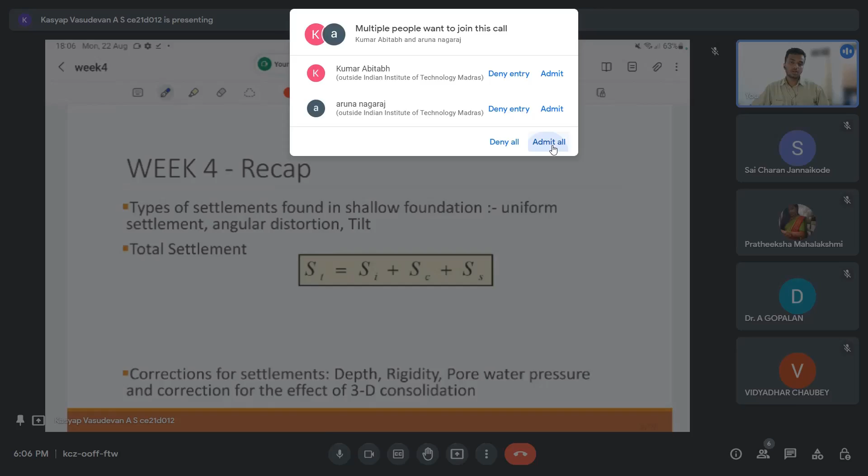So just for a little recap of what we did last week: week 4 deals with the settlements of foundation, especially shallow foundation. Last week we discussed shear strength, trying to find out the bearing capacity of the soil with respect to shear strength. But this week we are trying to also get the aspect of settlements, because settlement is also something which controls the safe bearing capacity, the allowable bearing capacity. Many times, even if failure has not happened, settlement would have been quite high, and in order to control settlement for serviceability, we will have to check the settlement also.

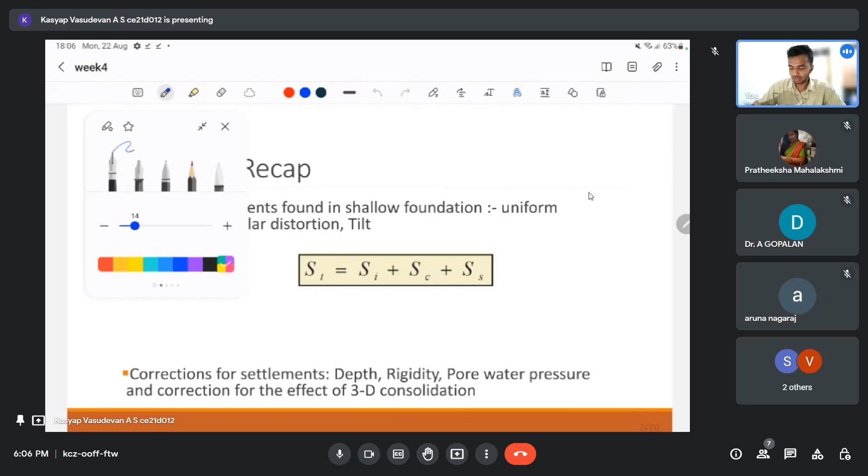So the idea is to figure out the settlement of a shallow foundation. When we say settlement of shallow foundation, we can define different deformations of shallow foundation in different ways. For example, one is uniform settlement. Uniform settlement is when we have the same amount of settlement throughout the base of the footing or foundation, wherever.

In a way, it is the safest foundation one can have, because there will be no structural damage to the constructed structure. Since the whole structure is settling uniformly at all points, there won't be any additional moment or shear force developed due to differential settlement. So uniform settlement is fine, but if it is very excessive, again the serviceability issue will be a problem.

For example, there are many cities that lie on lake beds, like Mexico City. If you go through the geotechnical problems they face there, there are buildings that have settled for a huge amount, like half a floor or one floor, and they have had to modify things. Though the structure is intact with no cracks at all, the whole building has come down because it's all on the same lake bed, and the stresses below the building are the same. Because of these things, uniform settlement can happen.

Though it's the safest among all the other things, there is an upper limit for that. So we need to take care of that.

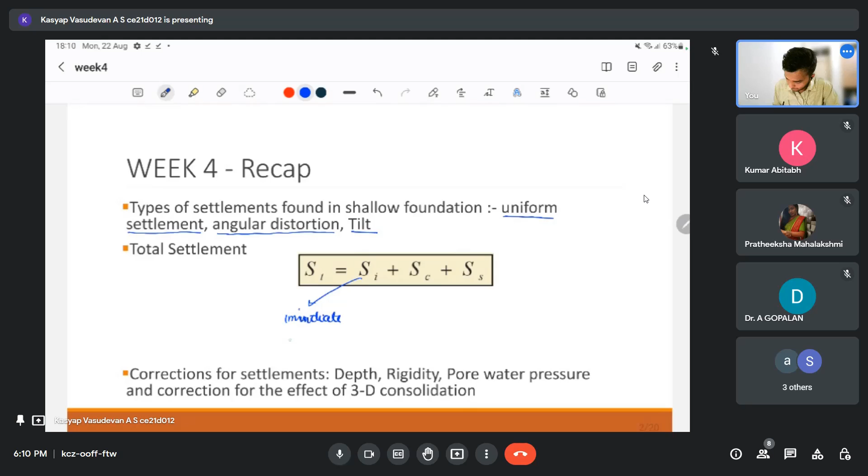So that is the three different ways of putting the deformations we encounter with shallow footing. When we say settlement, we have to mention these three settlements: there is immediate settlement, there is primary consolidation settlement, and there is secondary consolidation settlement.

Now the relevance of these three: the first one is also called elastic settlement, because the moment we load, due to its elastic properties, whatever material it is, it will have some elastic properties. Because of that, there will be an immediate settlement due to the material property. So this deals with elasticity, which is a material property.

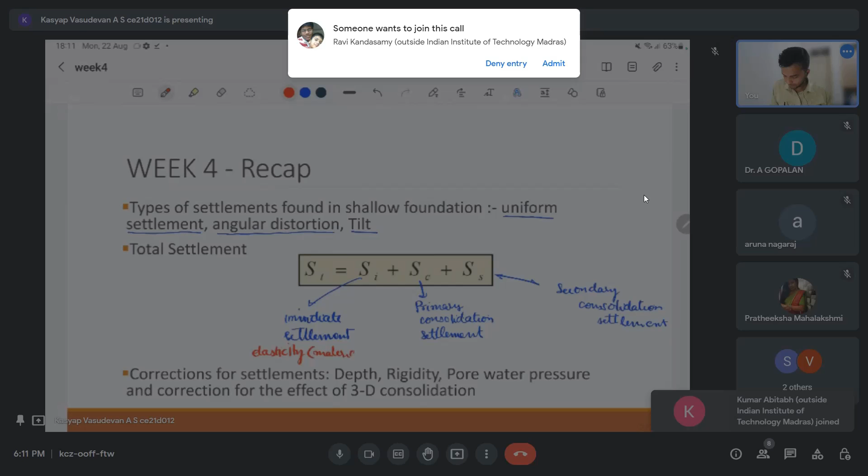And the second one is primary consolidation. This is exclusive for clays, right? So consolidation happens in clays, which is time dependent. This happens in clays, both normally consolidated or over consolidated. The idea is that water escapes out, and the volume of water that escapes contributes to the settlement. So that is the idea.

Okay, so the other thing is secondary consolidation settlement. This occurs in organic clays towards the end of the settlement. We assume that it happens after primary consolidation is complete. That is the assumption, but in reality it can begin the moment it is loaded. When there is too much organic content, this can happen because of decomposition of the organic matter, and also rearrangement of particles.

These two things can contribute to the secondary consolidation settlement. So when we talk about these things, all soils may not show these three settlements. For example, sand only deals with immediate settlement. It's quite intuitive, right? Because consolidation doesn't happen in sand, so immediate settlement is the dominant one. I could say that 100% is immediate settlement because of elastic compression.

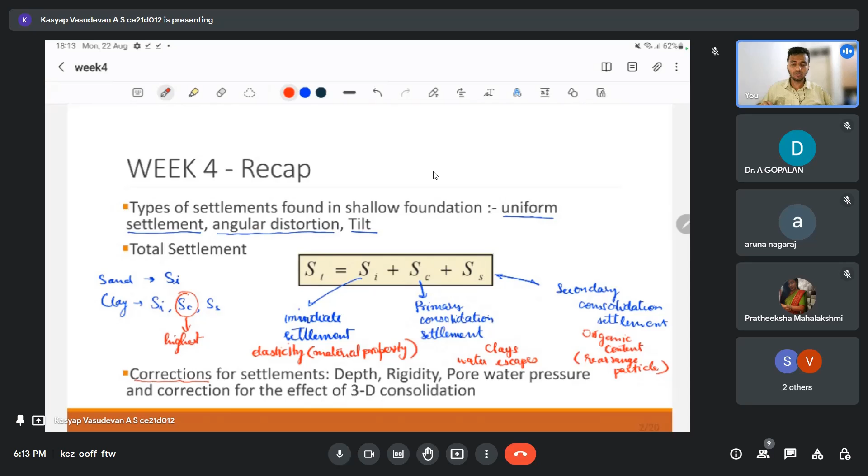Okay, then after that we moved on to the corrections for different settlements. So the thing is there are different factors that influence our settlement. For example, depth. In order to normalize our settlement for different depths, we bring it to the ground level using this depth factor.

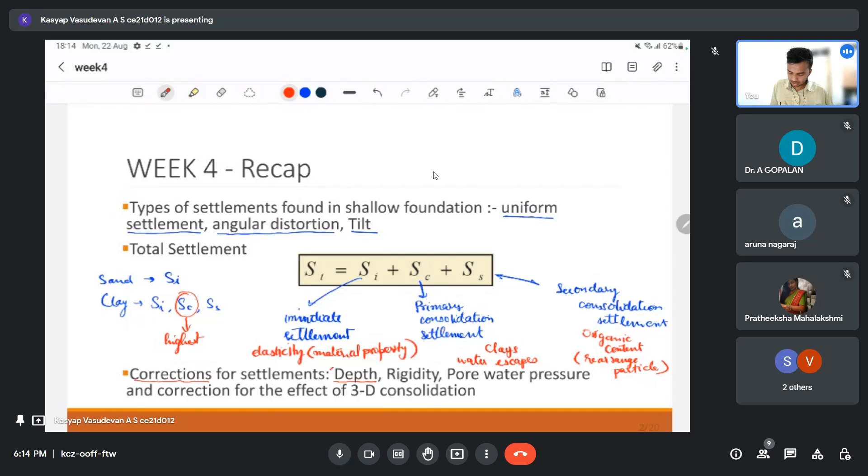And rigidity. The thing is, when we have a flexible footing, like any isolated footing, it can have different settlements at different points depending on the column position. At the middle it will be the highest, but when it is a rigid footing, it will settle uniformly. So if we are dealing with a rigid footing, for example a mat foundation or raft foundation, we'll have to consider that and reduce it a little bit.

And the other two corrections are for pore water pressure, or it can also be taken care of by the correction to consider the effect of 3D consolidation. If you remember, the equation for consolidation was derived from Terzaghi's 1D theory. But in our real world the footing is under 3D conditions, so the consolidation is happening in all directions. So we have to consider this particular correction for that.

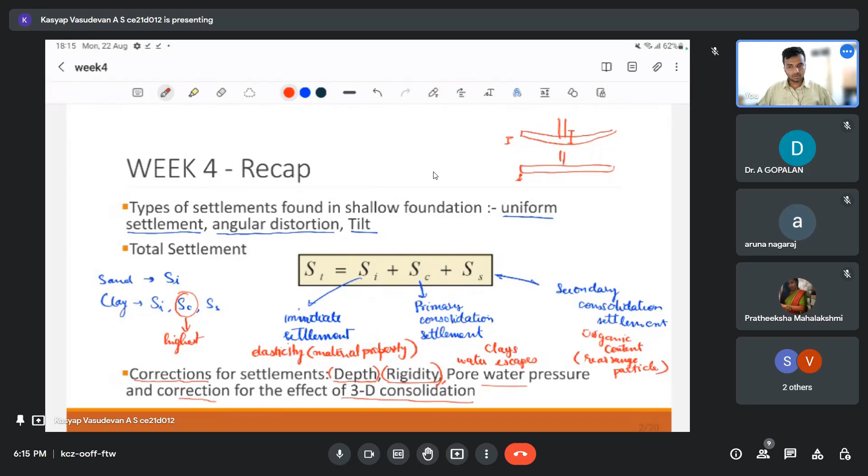Then we moved on to different ways of calculating the settlement. And among those, the primary one is the plate load test. This is a very important test for obvious reasons. As I told before, till now we were dealing with the shear strength of the soil in the last class. We were finding the safe bearing capacity, SBC and all, with respect to shear strength. And this week we were dealing with settlements.

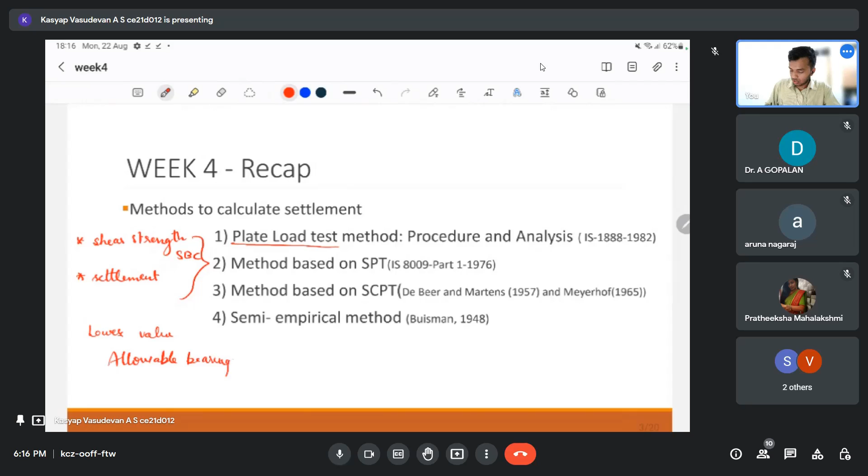So what the plate load test does is, okay, we'll have one more bearing capacity using settlement. Among these two we have to take the lower value. That will be our allowable bearing capacity, the capacity we will be reporting to the structural engineer to design the foundation. This is very important. So the plate load test gives us the relation between load and settlement.

Once settlement comes into picture, we can get our required settlement requirement, the tolerance. Each structure will have a different tolerance. So for our particular tolerance we can find the load acting on the plate, and from the plate we can arrive at the pressure at the footing. So indirectly we are getting the bearing capacity. Bearing capacity from these two criteria, where the lower value will be taken as the allowable bearing capacity.

This is a very useful particular test, especially for site investigation. If you are ever involved in these things, this we have to keep in mind. Procedure and analysis were both discussed in detail last week. Since this deals with field testing, this gives a better prediction for the settlement.

Now if we are not able to do plate load tests, we have other ways also to find out the settlements. One deals with SPT. From SPT we can directly get our settlement values. These are based on correlations. As I told earlier, correlations have their own disadvantages and limitations, but anyway this is also useful.

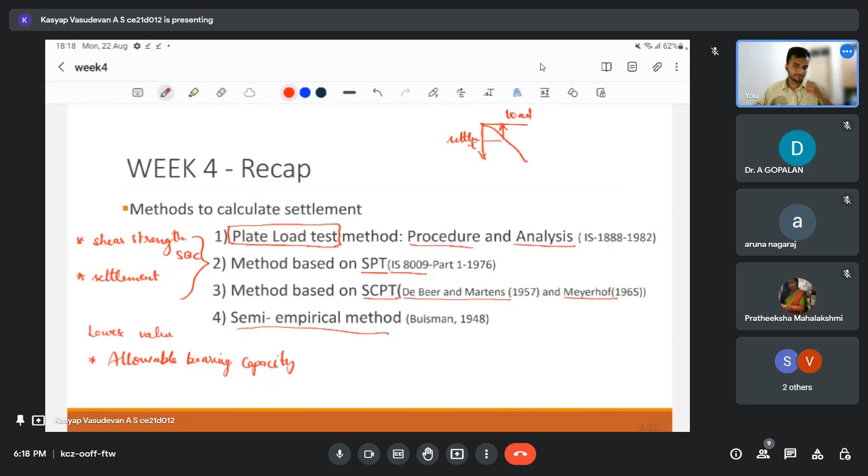Okay, so this was the things that were discussed. Let's jump on to the first question. The first question deals with a plate load test, and it's a granular soil. We know that the plate load test works better for granular soil. So we have a dimension of 60 centimeter for the plate. We also have a dimension for the foundation.

Plate settlement was found from the load settlement curve for the expected foundation load of 1200 kN. So this is the foundation, and we have the plate settlement given here. What would be the estimated foundation settlement? We are supposed to find the foundation settlement if the water table is at 2 meter below the base of the foundation. Use Terzaghi and Peck's equation for calculating the settlement, and the IS method for water table correction.

Before we jump into the questions, first let us see the equation which is important here, as they have asked for the Terzaghi and Peck equation. This is the Terzaghi and Peck 1948 equation, which relates settlement of footing and settlement of a plate.

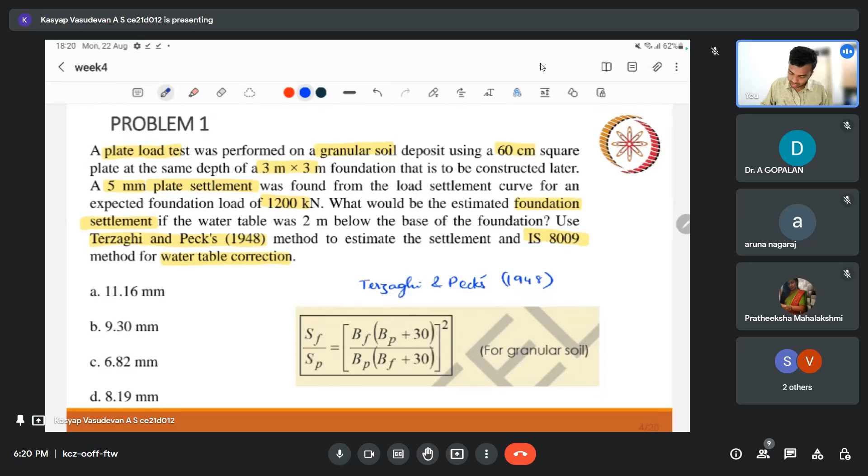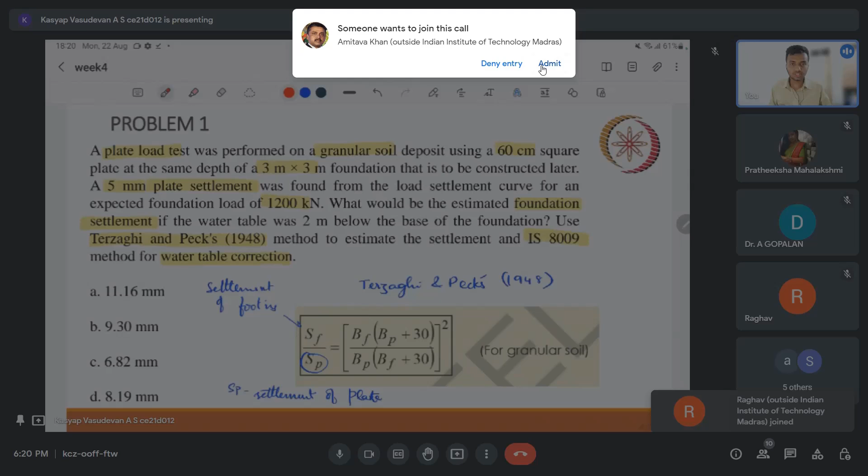So we have this: settlement of plate, SP, and settlement of footing, with suffix F indicating footing. Similarly we have other terms: width of the footing, BF, and width of the plate, BP.

From this equation you can directly understand this is empirical, because we have 30 just like that, so units are important. We have to substitute the unit for width of the footing in centimeters, so we should not forget that before we use it. This particular equation is only meant for granular soil. If it is a cohesive soil, we can directly take BF by BP in the RHS instead of the whole squaring thing.

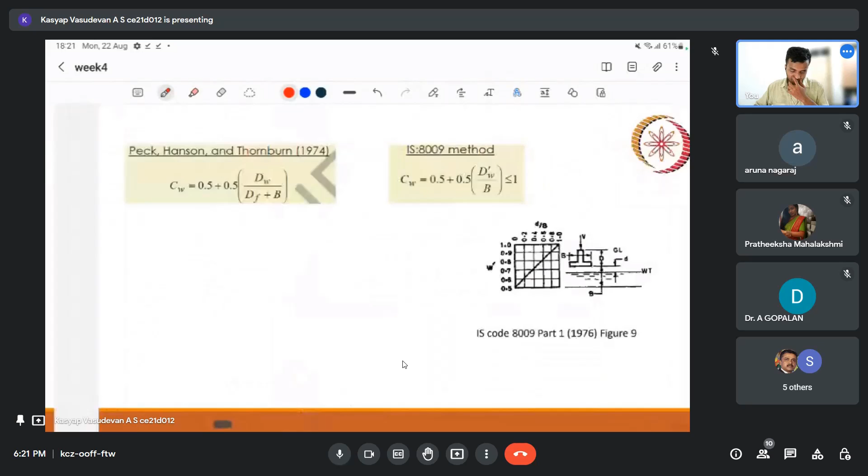Okay, let us first solve this. We have to find the settlement. In the question we have SP equal to 5 mm. BP is equal to 60 centimeter. BF, that is the width of the foundation, is 3 meter, that is 300 centimeter.

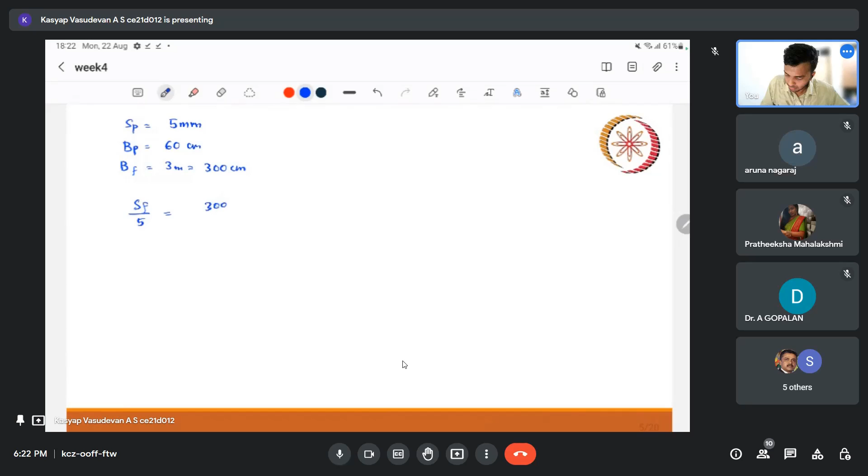So we can directly substitute this in the equation. SF by 5 - 5 I can write directly in mm, because whatever value I get for SF will be in mm, since this is a ratio, it doesn't matter. In the RHS we have BF by BP, so BF is 300 by 60, and at the numerator we have 60 plus 30, and the denominator we have 300 plus 30, whole square. This comes out to be, if you solve this, SF will be...

9.297 mm. So we have the settlement of the footing, but we have to correct it for water table also. When we correct it for water table, they have specifically mentioned it has to be the IS method, IS code method. So let us see what it is. When we say water table correction, there are two methods.

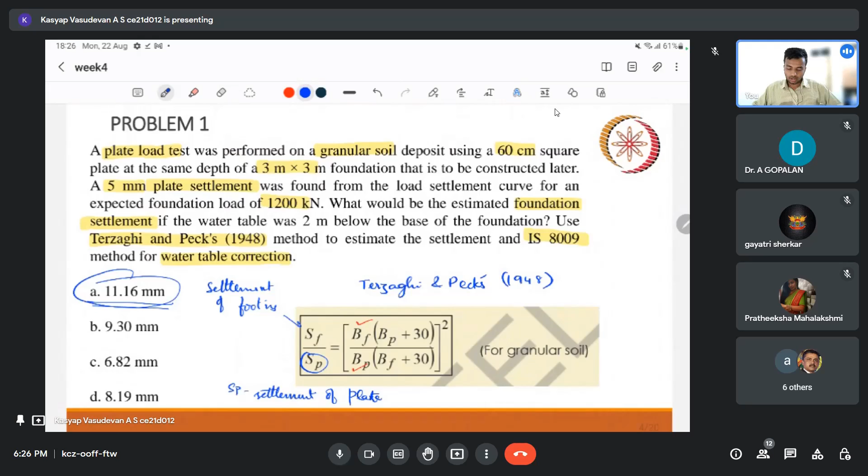So even if this question was extended to Peck Hanson, I hope you will be able to do it, because ground level - they have not mentioned ground level here. If they had mentioned ground level, or the depth of the footing, we can directly write this. I hope the first question is clear.

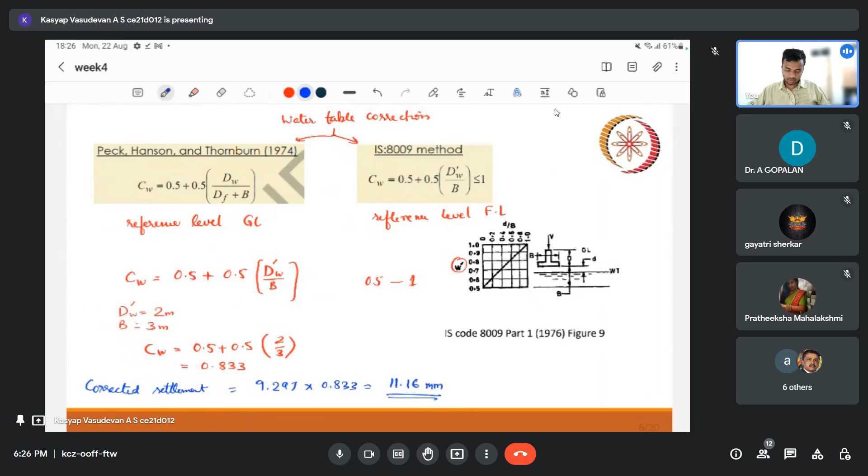Now let's move on to the second question. Second question deals with consolidation settlement, that is primary consolidation settlement. So let us just go through the question.

We have a footing which is rectangular, and the thickness of the clay is mentioned. It's normally consolidated clay, underlain by a rock layer. The depth of the foundation is given, and this is the expected load intensity of the foundation. Properties of the soil: we have submerged unit weight, CC, and initial void ratio also given. Water table was at the ground level. So find the expected primary consolidation settlement.

So primary consolidation settlement we are supposed to find considering 2:1 pressure distribution. At this stage we are not told to apply any corrections, so in this question they have mentioned - we will stick to that.

Before that, let's just recap the equations involved here. These are the two equations that we use for settlement. If you have gone through this before, it will be a repetition for you, but let me just explain it very quickly. There are two equations that we can use to find primary consolidation settlement - that is, these are the two.

One involves CC, that is compression index, coefficient of compression, and E naught, and the other involves coefficient of volume compressibility. So first let us be on the same page: CC is nothing but the coefficient of compression index, and E naught we know is the initial void ratio.

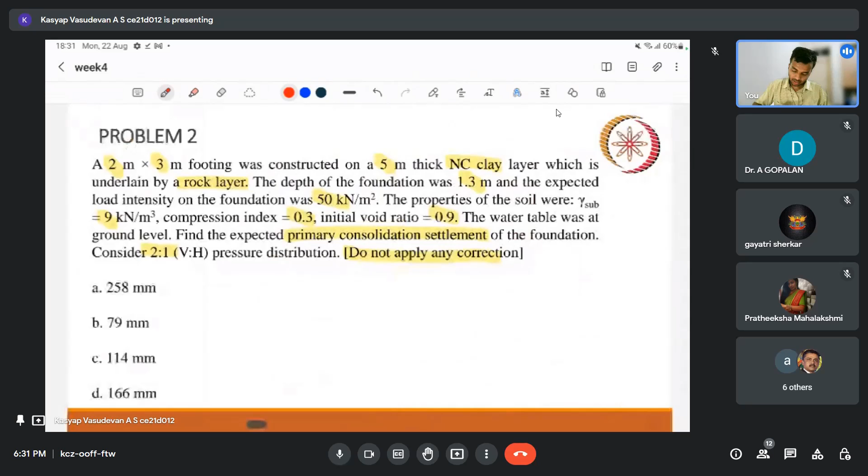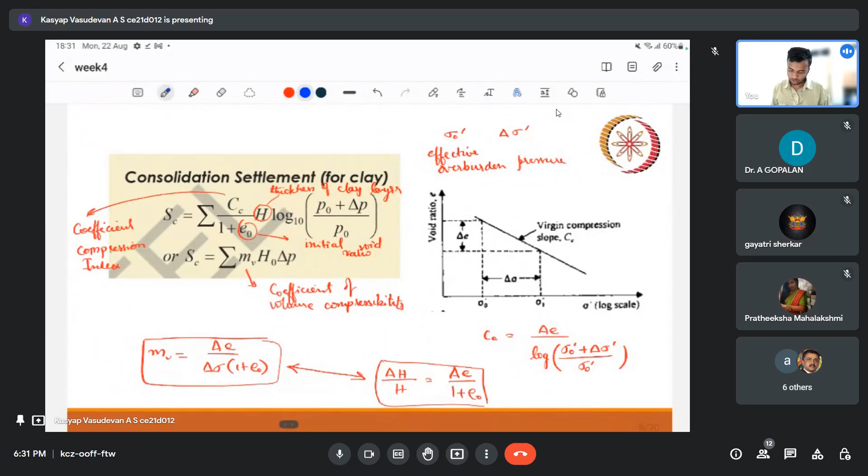So having said that, the data we have at this point is Cc and E naught. So the data we have is Cc is equal to 0.3 and E naught is equal to 0.9. So we can use the first equation here.

So this is at ground level. Groundwater table is at ground level, and this is a rock base that we have. The foundation level is at

what was the depth? 1.3 meter. So the total thing is 5 meter. Foundation depth is 1.3 meter. So what is our thickness of the clay layer available for settlement? That is 5 minus 1.3, that will be 3.7.

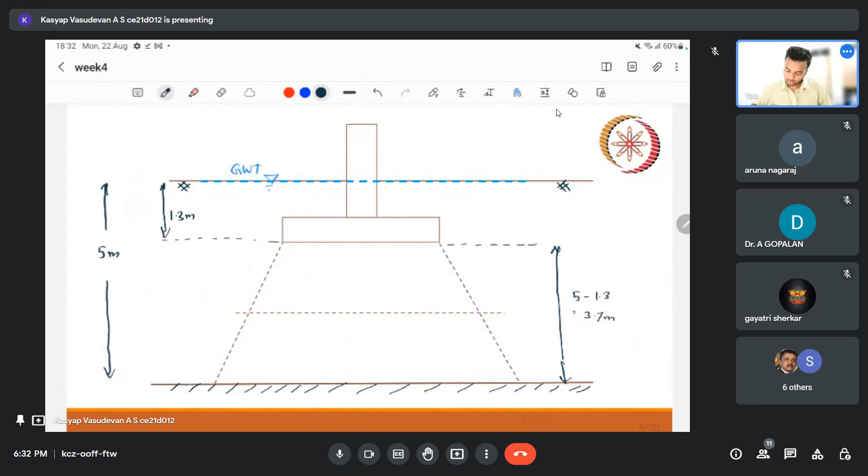Now, as I told before, we have E naught, Cc are constant. That is, there is nothing to worry about it. H is the thing that we are dealing with here.

The influence zone. What is influence zone? We'll come to it in the coming slide. Influence zone is taken as 2b from the base of the footing. So base of the footing is here. It is 2 meter, right?

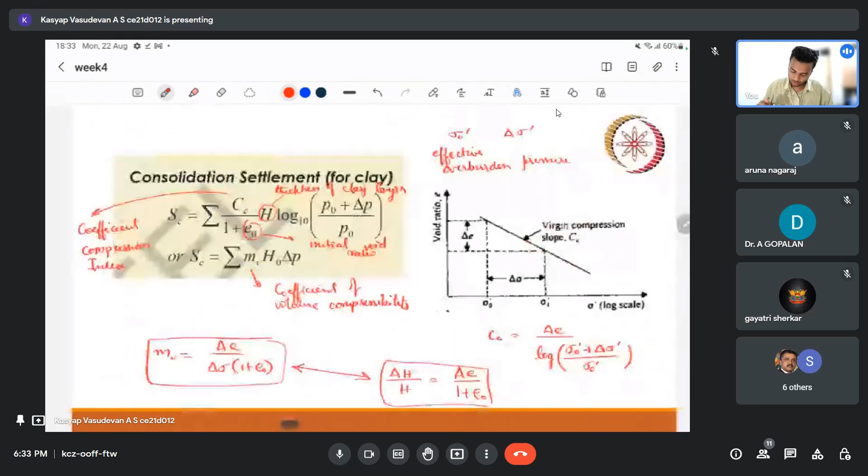Yeah, so width of the footing is 2 meter. So our 2b will be, sorry not 5, 4 meter. And if you see 4 meter plus 1.3, it will go beyond this hard strata. So our consolidation will only happen till here. So we can come at 3.7. Why this 2b, we will come to it in future.

Now another thing here involved is our delta p and p dash. So let us come to that.

Okay, so p dash, that is a sigma dash, that is overburden pressure. So we are trying to find the settlement at this point. Actually, strictly speaking, whatever we are going to find is here, assuming that we are taking the average for the whole clay layer which is available for settlement.

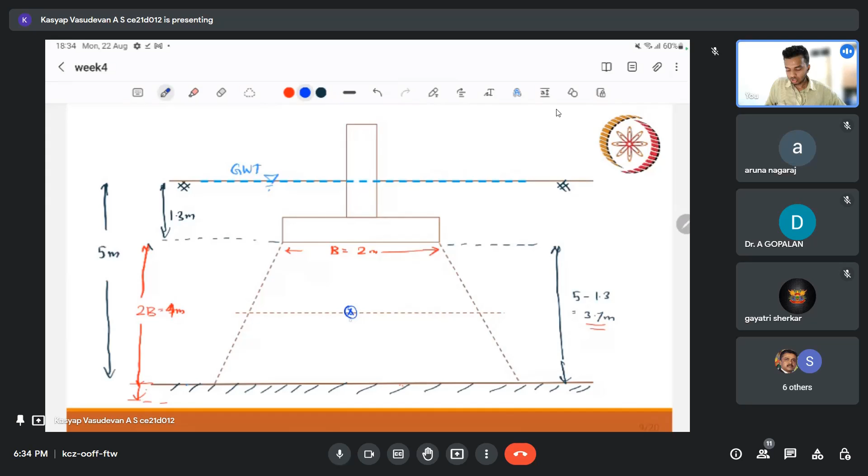So at the center, at the middle of the layer, we are considering trying to find the settlement. So the stress at this point, we are dealing with the stress at this point. So half of this middle layer will be 1.85. That is 3.7 by 2, 1.85 meter.

So overburden pressure. So the thing, details that we have is, gamma submerged is 9 kilonewton per meter cube. So overburden pressure is quite clear. We have 1.3 plus 1.85. So the depth is 1.3 plus 1.85 into gamma dash, that is our 9. This turns out to be 28.35 kPa.

Okay, our last headache. This is the most important part in this equation. Delta p, or delta sigma. This depends on how the load is getting dispersed from the footing to the deeper depths. So in this case, in the question, they have directly given 2:1 will be the pressure distribution.

That is actually debatable - it's the easiest way, but it is debatable. But since they have mentioned it, we can take it as 2:1.

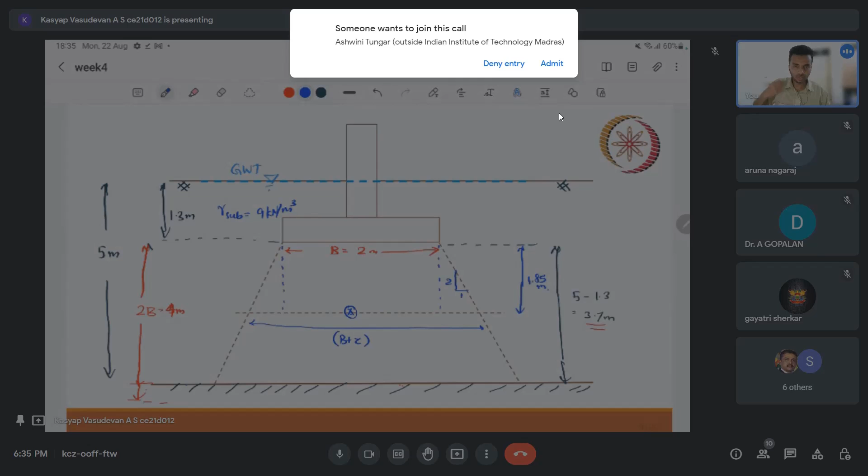So if it is 2:1, our dimension, like the pressure distribution, will be along this length. So this length can be written as b plus z, the dimension will be increased by the depth. Since this is our z, this part will be z by 2, this part will be z by 2, because it's 2:1, and the total will be b plus z. So our length in the other direction will also increase by z. But we don't know the total load, right?

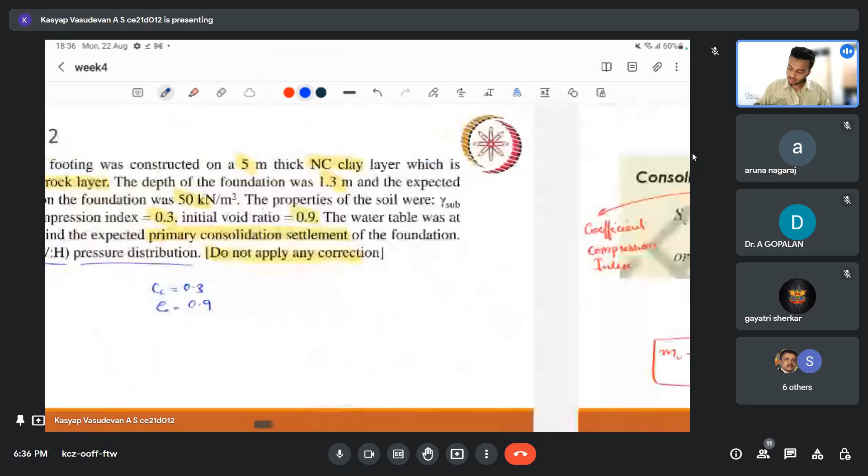We are only given the foundation pressure. So at the foundation we have q equal to 50 kPa. We can calculate the total load as q into l into b. That is 50 into 3 into 2, which is 300 kilonewton.

So what will be the stress at this depth? We'll have to consider the whole length at the middle layer, that is b plus z and l plus z. That will be our change in stress at the required middle layer. That will be 300, that is the load, and that will be the same.

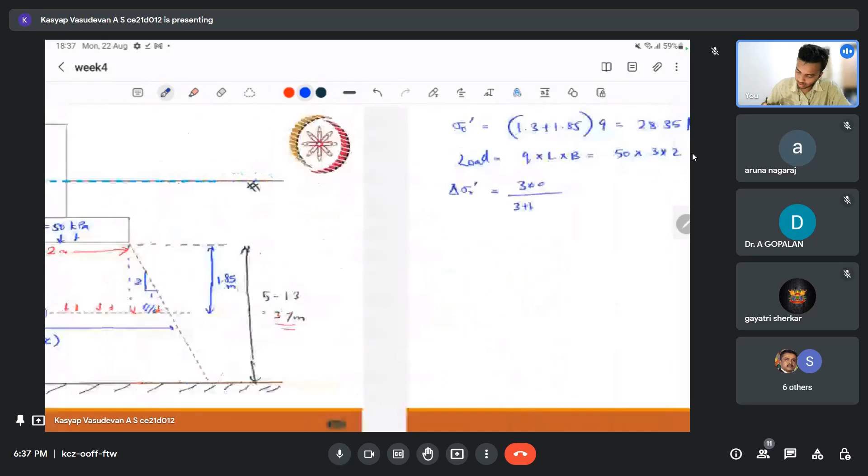Divided by the new denominator - our 3 will be increased by z, which is 1.85 for us. So 3 plus 1.85 and 2 plus 1.85, that is the length and breadth, both increased by 1.85. This turns out to be, if I'm not wrong, 16.06 kilonewton per meter square.

So we have all the terms now. Now it's just about substituting. So S can be written as 0.3, that is our Cc value, 3.7 that is our H, the thickness of the clay layer available for settlement, and 1 plus e naught, e naught is 0.9, log of sigma, that is 28.35, plus delta sigma is 16.06, divided by 28.35.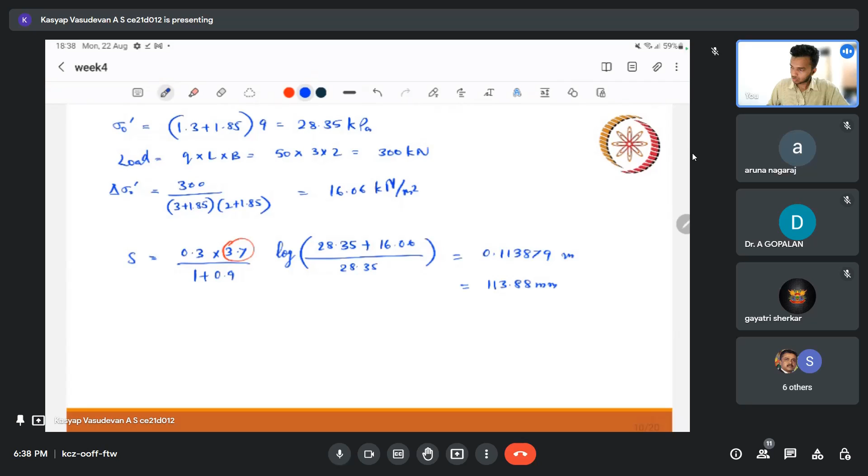This comes out to be 0.113879. Whatever unit we give for the thickness of the layer, that's what we'll get - so this is in meter. We can write this as 113.88 mm. So one of the options is 114.

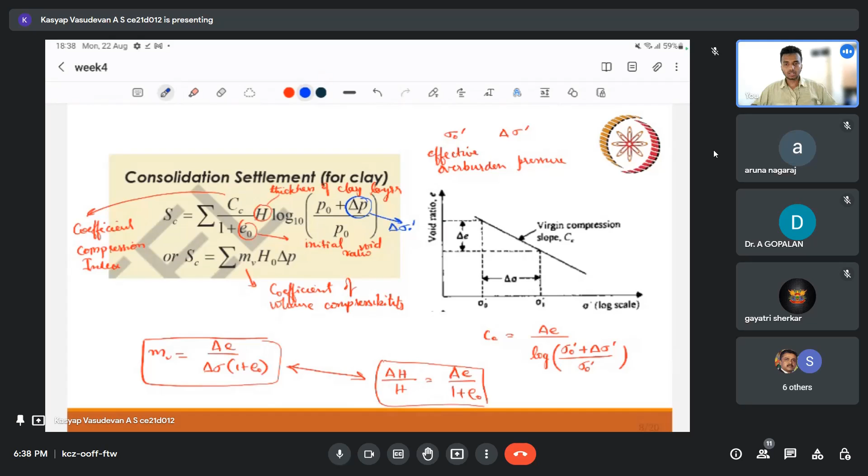So that's it. This equation is very important. When it comes to consolidation of clay, we need this at our disposal all the time, so all the terms should be clear.

Here, the thing we need to understand is this load dispersion. Since this is 2:1, we have to add this particular length at the bottom, that is z by 2 and z by 2, that becomes b plus z. And since it is 3D, in the length direction also there will be dispersion, taken care of by l plus z. That's why we have taken the new values.

So as you go deeper and deeper, the increment in stress due to the footing will be lesser and lesser, since the denominator will be increasing - L plus Z and B plus Z will be higher.

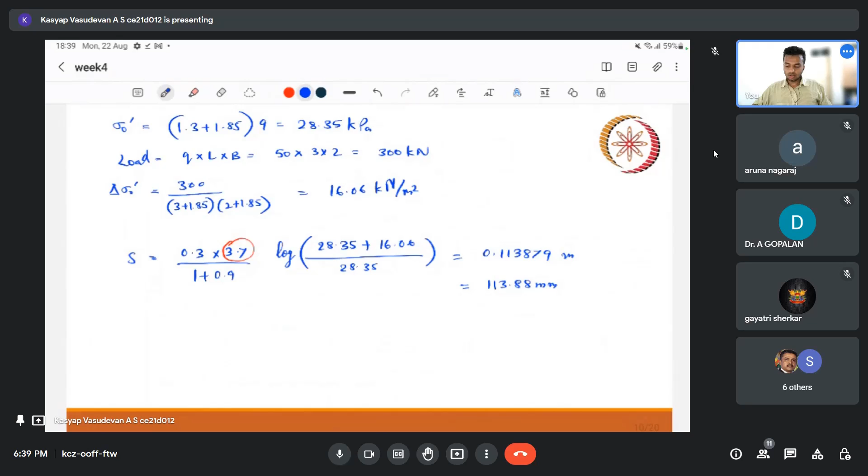Moving on to the next question, which deals with estimation of settlement itself. We have an isolated square footing, depth of the footing is 2 meter, in a sand deposit. This time we have sand - till now we were discussing clay. Now column load is directly given as 1500 kilonewton, and thickness of the sand layer is 12 meter. Here the thickness is quite considerable compared to the dimension of the isolated footing, so we will come to how that turns out.

Properties of sand are given - gamma is given, and cone resistance. As we discussed before, from cone resistance we can arrive at the settlement. There are different correlations, two of which we discussed, and they have told us to estimate the settlement using Meyerhof's method. Water table is at the base of the foundation, consider gamma w, and do not apply corrections.

So this is the equation involved here using the standard penetration test. We have talked about this before - we have different correlations for SPT and SCPT, static cone penetration test, using which we can use this equation. Here H is, as we discussed before, the thickness of the soil layer available for settlement.

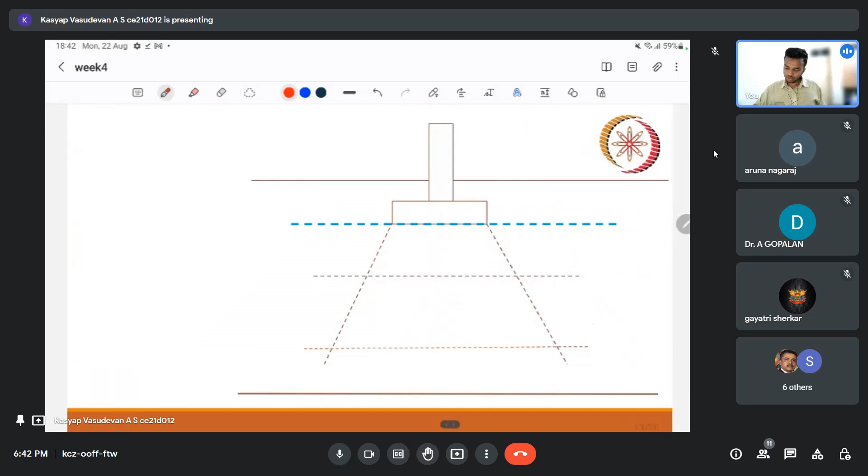So let's jump into the question, how it is. We have the ground level here, and the water table is given.

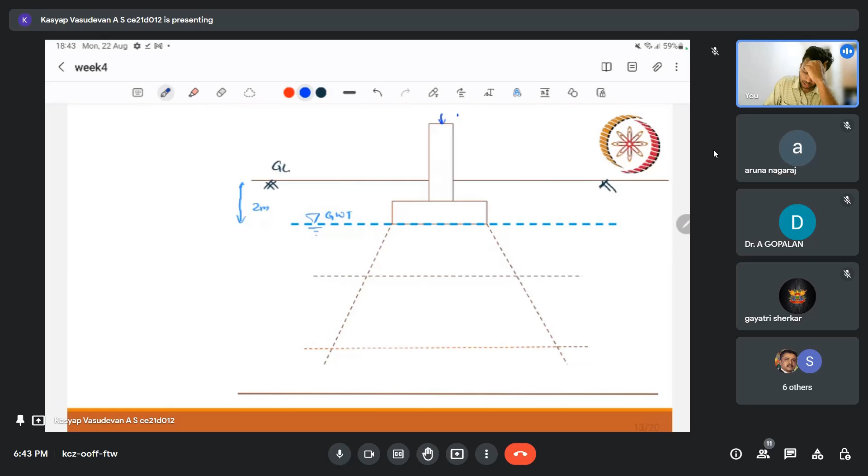So this depth is same as the depth of the footing. I think that is 2 meter. Okay, depth of the footing is 2 meter. And load that is acting is 1500 kilonewton, and the total depth that we are dealing with is 12 meter.

So that's what we are talking about now. When I say 12 meter is quite high, so we cannot take the whole 12 minus 2, 10 meter as the thickness of the soil which is available for settlement, because as I told before, that is the influence zone.

Now what is influence zone? So our influence zone is 2b. What is our b here? That is the width of the footing, which is 3 meter. This is a square footing, so 3 into 3. So this will be 6 meter. So only this is the influence zone.

So how did we get the influence zone? It's like if you draw the pressure bulb below this footing. When I say pressure bulb, it is a line which represents the same pressure. There are different pressure bulbs for different pressure levels.

So if we plot the pressure level for 10%, that is, if this is Q at the top, and 10% of Q, if we draw a line joining all the points which have 10% of Q, that depth will be 2b for a square footing. For strip footing and other shapes it will be different, but this is the significance. So 10% of Q is considered the limit; beyond that we are neglecting it. If we plot that, it comes out to be 2b. That's why we are considering only 2b from the base of the footing.

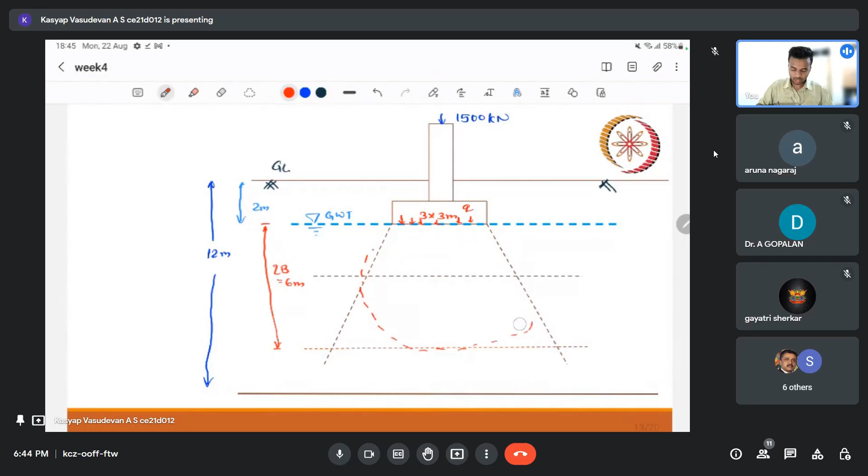So having said that, this shape and all can be obtained from different pressure distribution theories, the most famous one being Boussinesq's theory. So we are interested only till 6 meter from the bottom. The rest is similar.

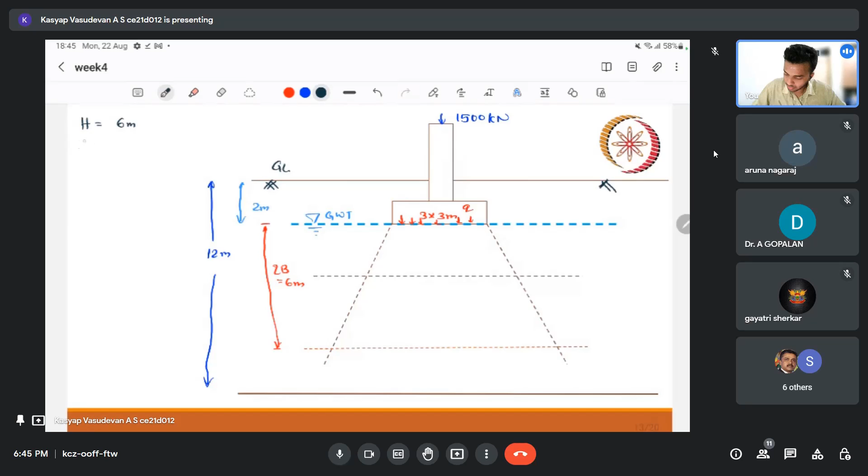What we have is H, we know C. I guess we can directly write it. So our settlement: H will be 6 meter, only 6 meter is available for settlement. Our C value, we have to find C value. C is equal to 1.9 by Meyerhof's method, 1.9 QC by sigma naught.

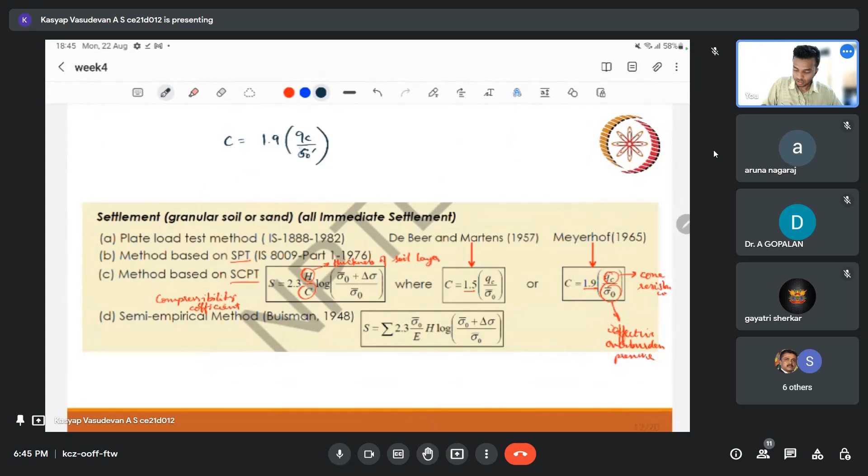Oh, so I forgot to find sigma naught also. Sigma naught is the pressure that is at the middle of this layer. That means this distance is 3 meter.

So sigma naught will be... this is the initial, okay sorry, sigma naught we are talking about is just the overburden pressure before the footing. So sigma naught is equal to just the first layer, this gamma is nothing but 19 kilonewton per meter cube.

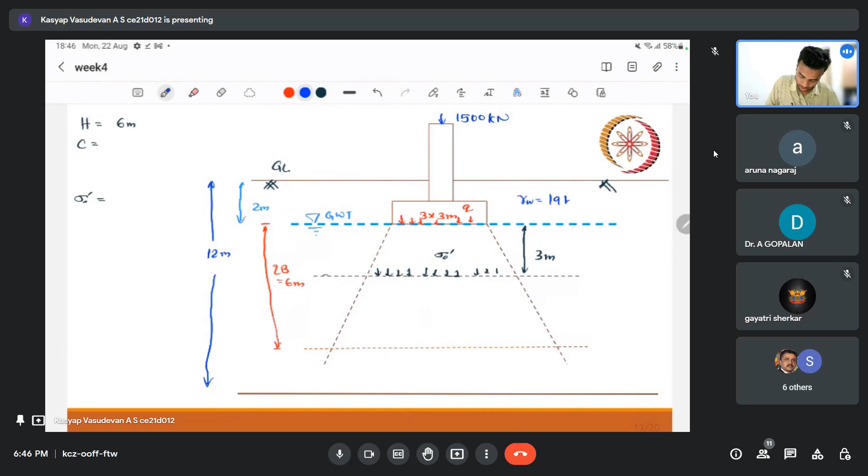We can conveniently take it as gamma sat also. Sorry, not gamma w, this is gamma bulk, equal to 19 kilonewton per meter cube. So we can assume gamma submerged is equal to 19 minus 10, that is 9 kilonewton per meter cube below the groundwater table. So first 2 meters it will be 19 into 2, plus gamma submerged into 3. This turns out to be 65 kilonewton per meter square.

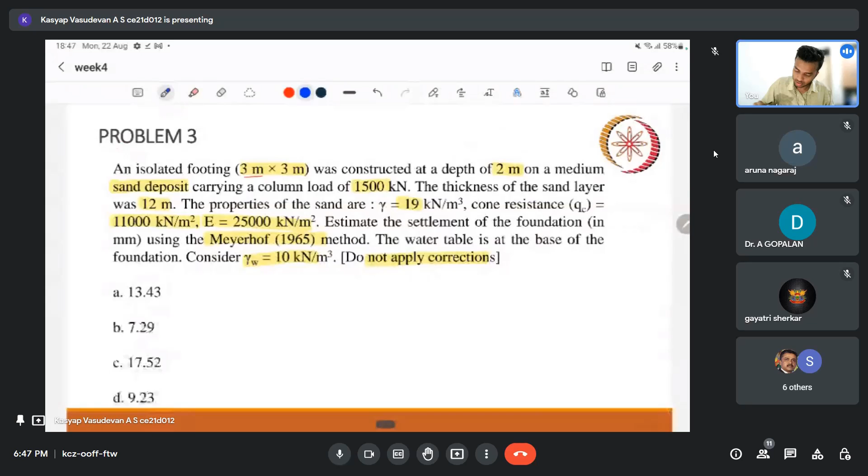So in this equation we can write 1.9 into QC. Cone resistance is 11,000. So 11,000 divided by 65, where 65 is our effective overburden pressure. This checks out to be 321.54.

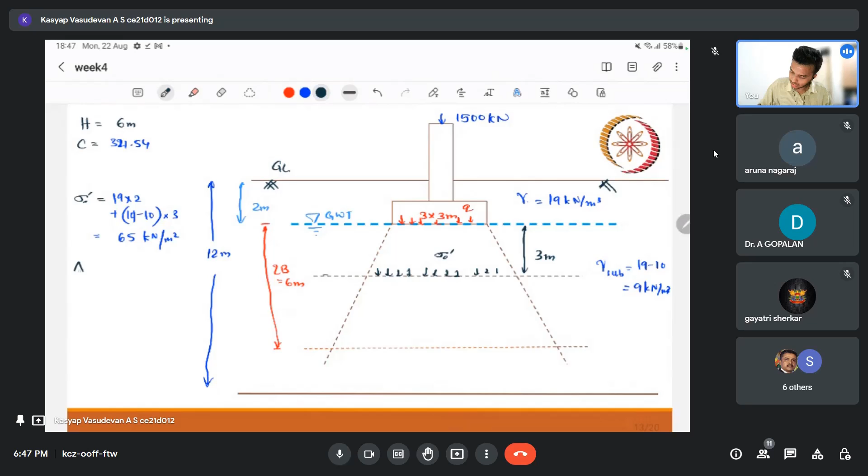So we have 321.54. What are the other things we need? We need delta sigma. In order to write that, we need this distance, which is nothing but b plus z. So 3 meter plus the depth, and b is 3 meters.

So again this 3. So our load is 1500 divided by 3 plus 3, since it is square, again 3 plus 3. That will be 41.67 kPa. So we have all the terms required.

Now we can directly substitute in this equation. S is equal to 2.3 into 6, that is our H, divided by C value, that is 321.54, into log of... okay, let me write this properly.

So the whole thing is 12 meter. Log of 65 plus 41.67 divided by 65. If you write this, the answer will be 9.233 mm. So this is the answer we have. Do we have? Yeah, we have an option 9.23.

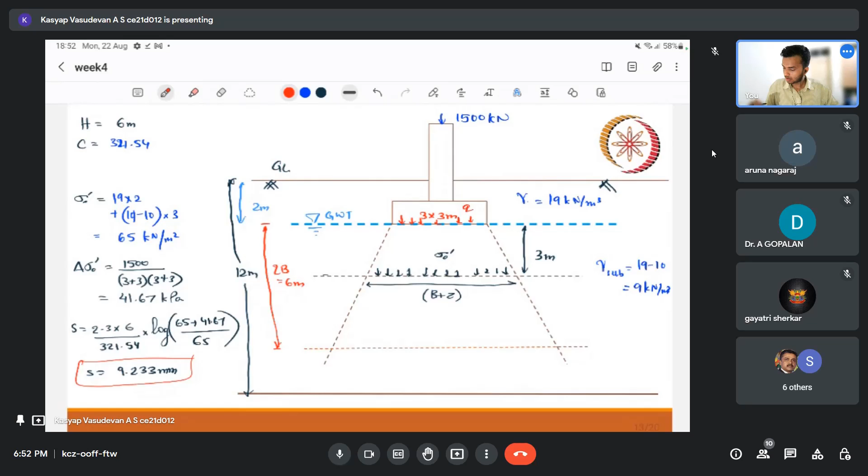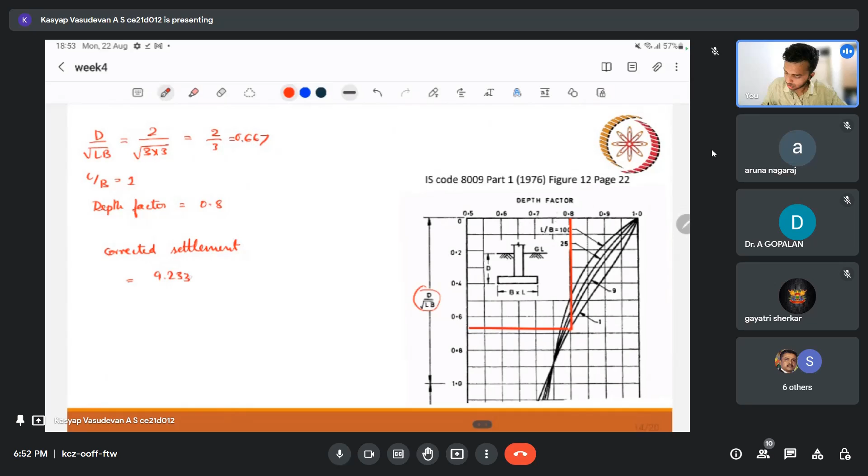So I can write depth factor, 0.8. So our settlement can be corrected, settlement is equal to 9.233 into 0.8. That will be, sorry, 7.39 mm. Okay, so I hope you got the idea.

So the purpose of this correction is like we are trying to get the settlement that will be happening, so we are taking the reference as the ground level. So what if the footing was at ground level? So at ground level our correction factor is 1. So we are bringing all the footing to the ground level, we could say, by doing this correction.

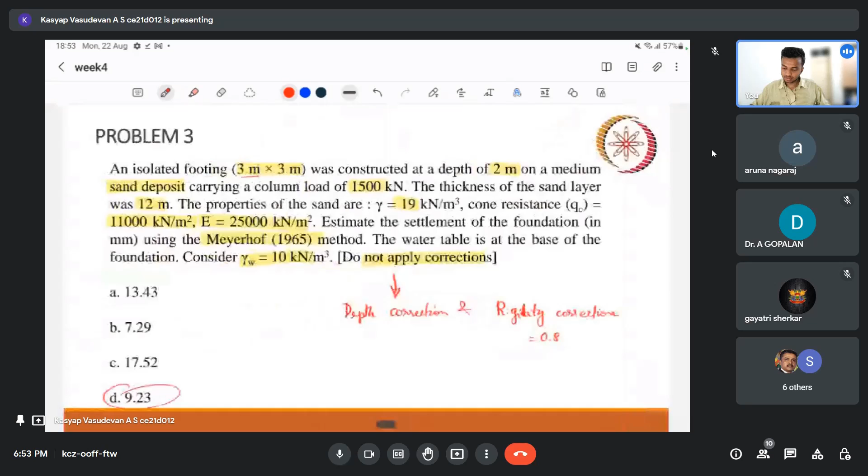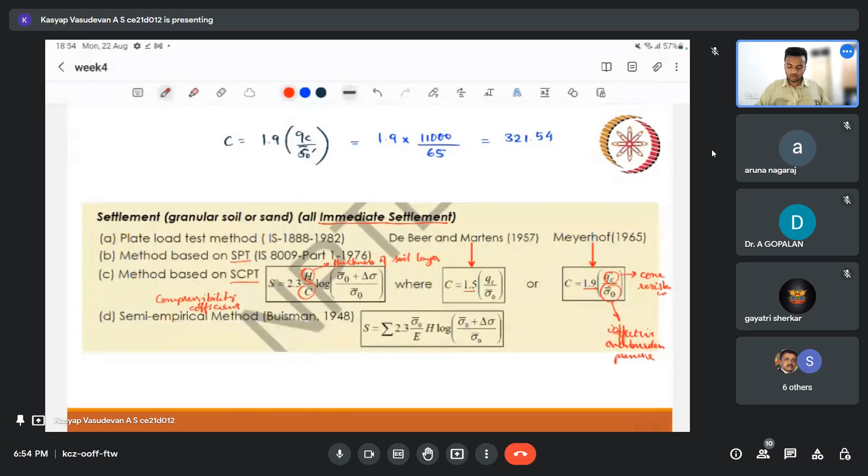Generally we can take Poisson's ratio as 0.5 for clay and 0.3 for sand. These are general values. Since we are dealing with sand here, we can take 0.3.

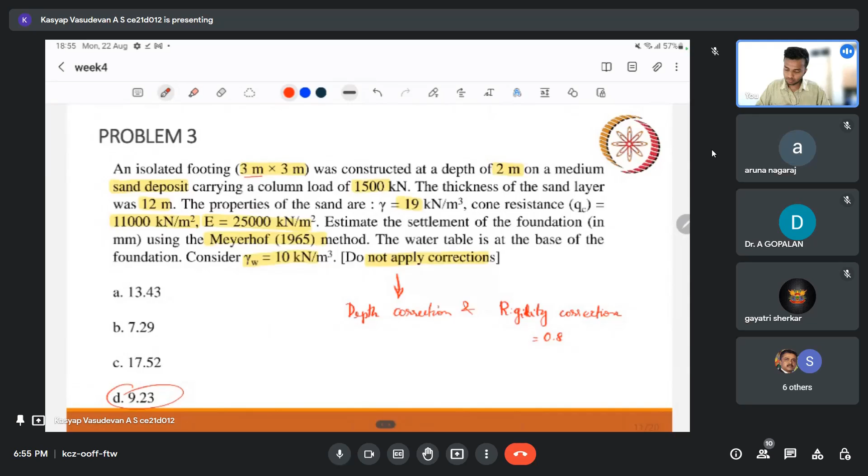There are different tables in different textbooks and codes that you can refer to for different Poisson's ratios. This is the elastic modulus, which I guess we already have in the question. That is 25,000 kPa.

Applied pressure, as I discussed before, we know it's 1,500, and applied pressure will be 3 into 3. Width of the footing will give us 166.67 kPa.

Mu, I already told you, is 0.3. B will be 3. Another thing left is the influence factor. For different shapes and positions of the footing, we have different influence factors. This particular table is from the IS code itself. Since we are dealing with a square footing, and checking settlement at the center, we can take 1.12 as our influence factor.

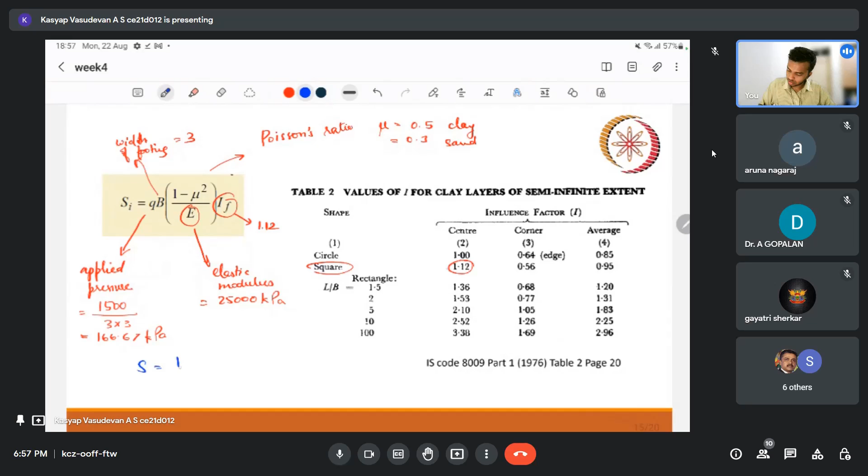Quickly finding the settlement, Si equals 166.67 into 3, (1 minus 0.3 squared) by 25,000, into 1.12. This turns out to be 20.4.

To this we can also apply the correction factor for depth, not the influence factor. So corrected settlement will be 20.4 into 0.8, which gives 16.3.

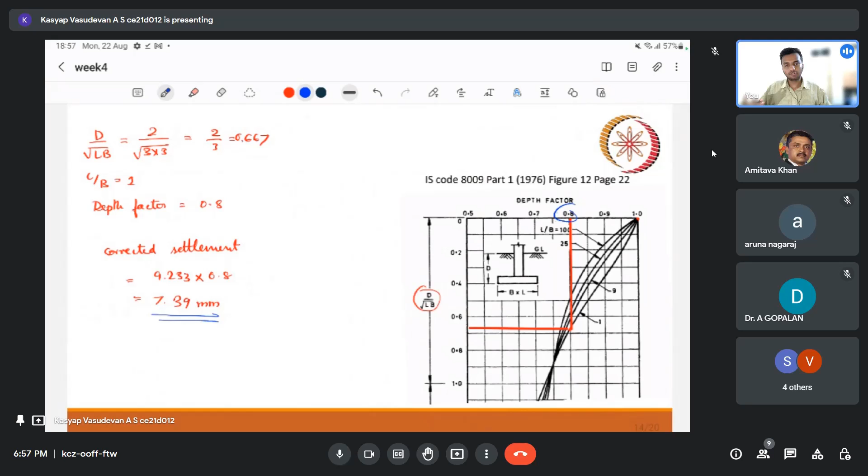You can see it's quite a high value compared to when we used Meyerhof's method. Settlement is quite important in our design, so to make it economical, we have to get the correct settlement as accurately as possible. Though it may be overestimating, there won't be safety issues, but material cost might be very high. In the absence of other data, we can use this.

In this equation, there are more assumptions. We assume it's an elastic material, and Poisson's ratio is assumed constant throughout. The influence factor is a big loophole, so these things we have to consider.

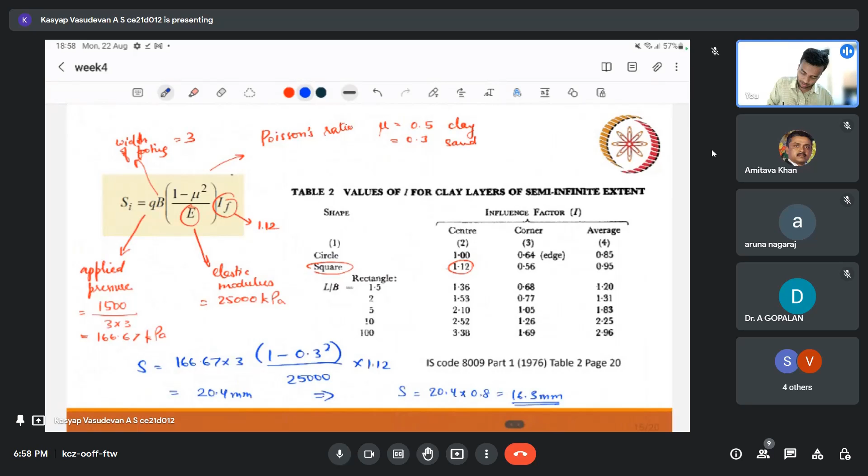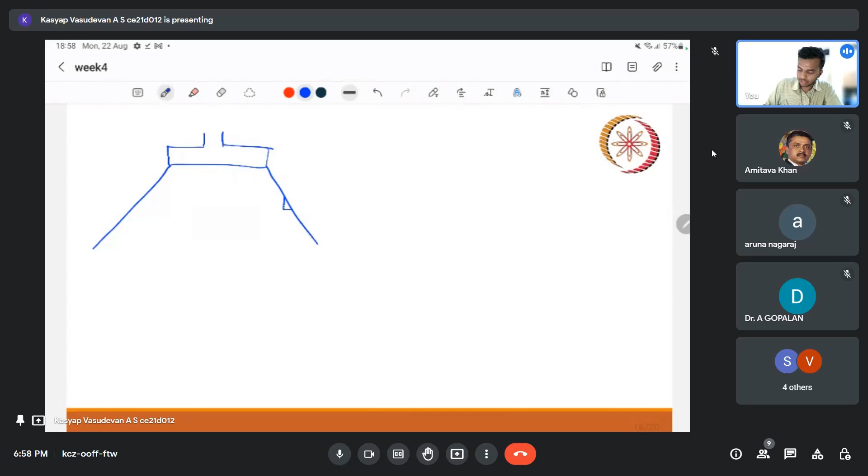Having said that, you'll notice we have different values for corner, center, average, and so on. Till now we were dealing with this, so let's talk some more on this load distribution. I told you this particular 2:1 assumption is used to find whatever depth we want.

What's actually happening is we take the average stress throughout, because we divide the whole load by our increased length, that is L plus Z and B plus Z, for a rectangular footing. In this assumption, this is treated as uniform. So if I write this as sigma naught, delta sigma naught, and plot it, delta sigma naught will look like this.

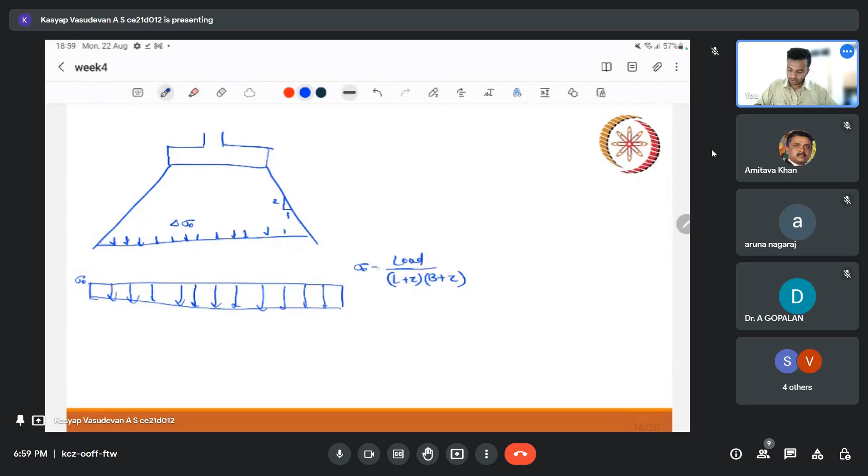But in reality, that is not the case. In reality, it will have a peak at the center and less at the edges. So delta sigma is different at different places.

Delta sigma will be maximum at the center of the footing, and as it goes to the periphery, at the same depth we require, we'll get a different sigma. But we already know in our settlement equation, we have CC H by 1 plus e naught, and log of sigma naught plus delta sigma over sigma naught. This delta sigma is varying now.

At different depths, at different radial distances, at different distances from the center, our delta sigma is varying, so our settlement will vary. Since settlement is varying, we'll have a difference in settlement: at the middle it will settle more, at the edges it will settle less. So we might have something like this.

My point is, when we consider this assumption, we have to remember that we are treating it as a uniform load, but actually we're supposed to use the varying distribution. There are different pressure distribution theories, and the IS code encourages Boussinesq's theory.

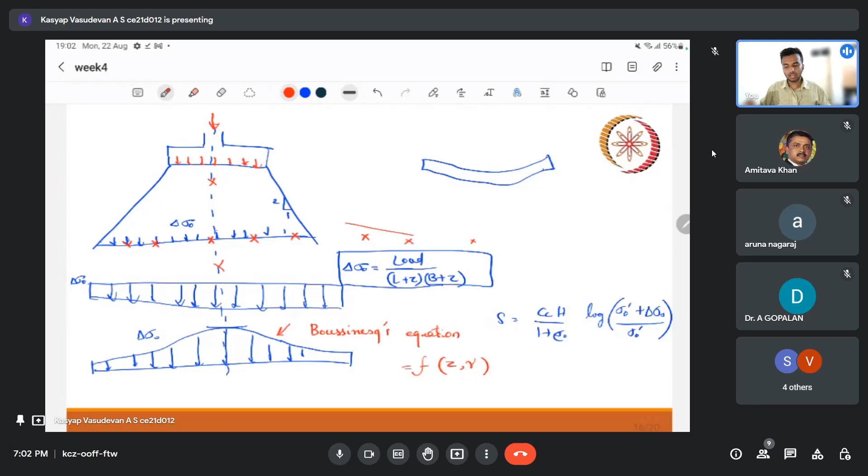For different loading cases, like a flat plate load, there is an equation, and also for point load we have equations. Since the IS code encourages Boussinesq's theory, you can go through it to get different results at whichever point you're interested in. Even outside the footing, it keeps decreasing until at some radial distance it becomes insignificant, near zero. Since it's a function of z and r, the radial distance from the center and the depth from the footing level, you can use this to find different stresses.

Just to end with a light question, let me do this quickly. This is just a small question.

Settlement of two foundations are 75 mm and 150, let's say 75 mm and 115 mm. How much is the angular distortion? It's nothing but the difference, right? So we have two different footings, one settling more than the other, so we will have an angular distortion.

So angular distortion can be written as the difference in settlement, that is 115 minus 75, divided by the length between these two footings from the center line, which is 5 meters, that is 5000 mm. This will be 1 by 125. The answer is this.

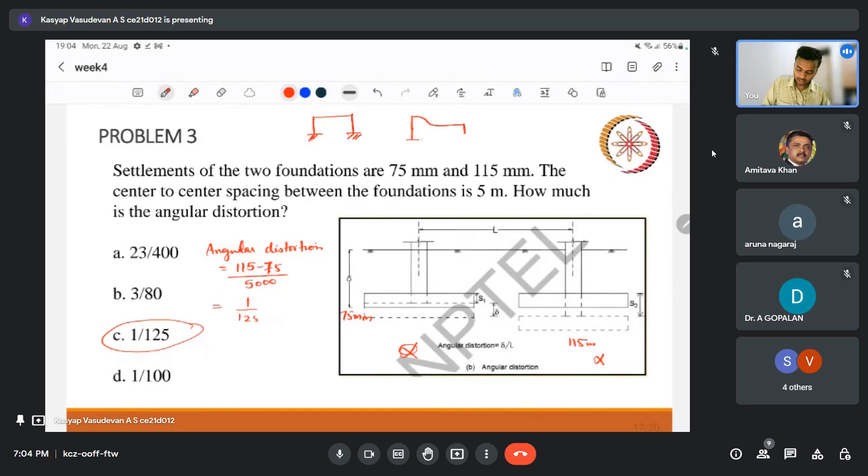This is because the soil at this point and this point will be different, and its properties could be different, and this can be expected. So it's very catastrophic because this is also called differential settlement. So what happens is, in a frame structure, if one footing is settling more, we will have a lot of moment and shear force involved to resist this settlement.

So this beam is under a lot of tension, and if it is a framed connection, all the beams and columns will be under a lot of stress. It will be deforming like this. So that is a big problem, our structures will fail very fast.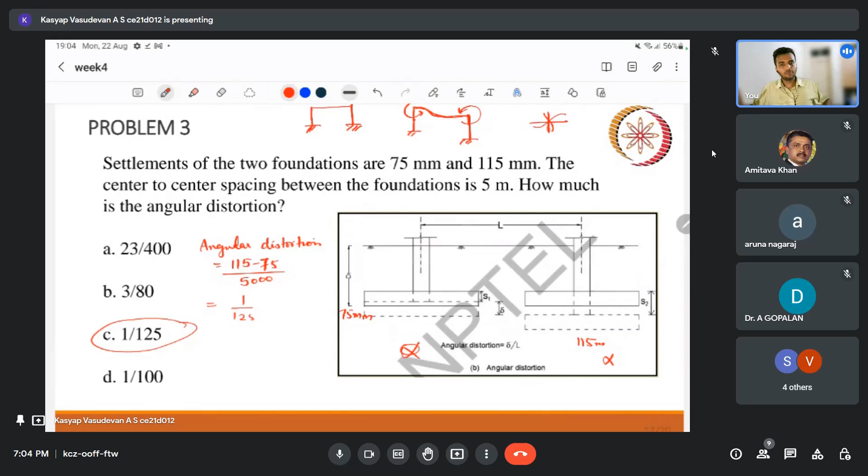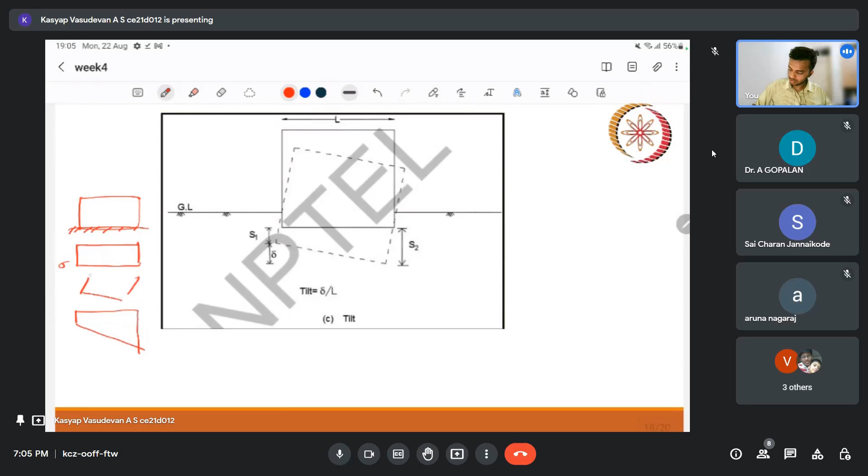Another thing we discussed was tilt. Initially, if our structure was like this, our bearing you can assume it as sigma. But once it is tilting, after tilting, it can go like this. So if our structure is tilting like this, our sigma minimum and sigma maximum come into picture.

We have to check that sigma maximum is less than SBC. Also, we have to be very careful that sigma minimum is not less than zero. It should not go below zero, because once it goes below, that means it's tension. So sigma minimum should not go below zero, and we'll have to take care of that. That's how this is important, also for serviceability and stresses on the members, but this generally happens.

Sound problem. Hello, am I audible now? Hello, no sound here. Hello, am I audible? Can anyone respond? Yes sir, you are audible. Okay, thank you.

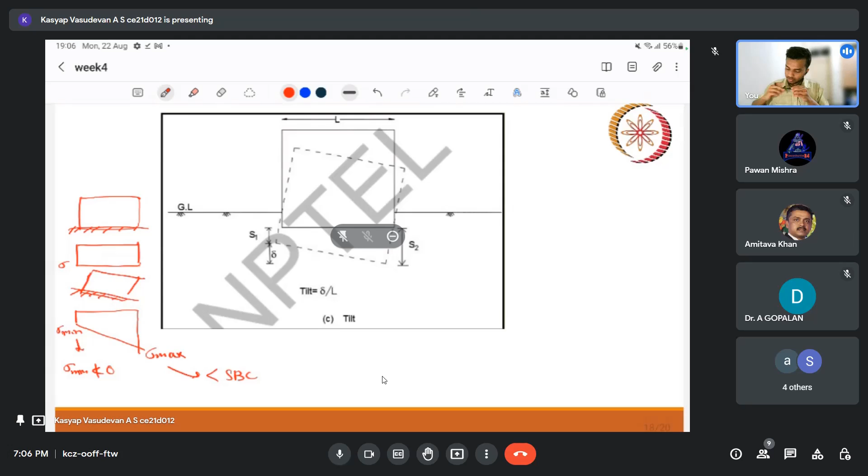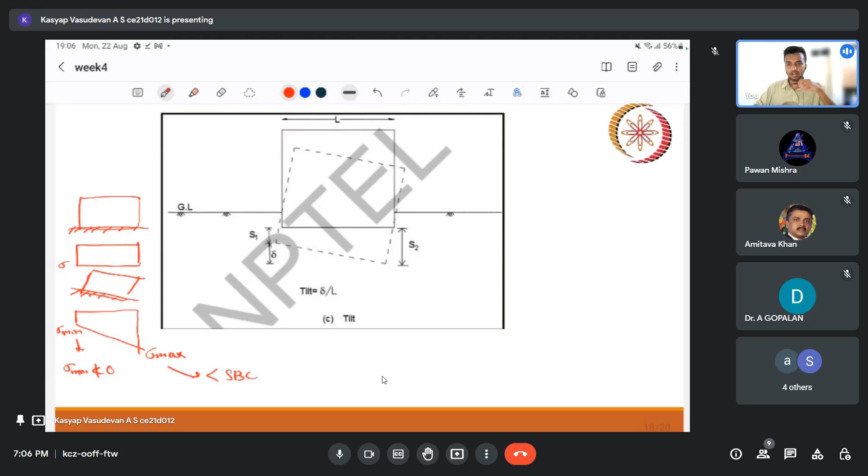So that's why tilt is important. When we have tilt, we'll have to take care of this. There might not be any structural damage, but this can cause bearing capacity problems, since we suddenly have two different stresses to take care of.

Having said that, just to conclude, this week is summarized in one of the slides. I'm pointing out this particular slide because it covers most of what was discussed this last week. We have the immediate settlement equation here, and the consolidation settlement equations we discussed, along with the four different methods to find immediate settlement for granular soils. In addition, we also have the corrections I mentioned before, the depth and rigidity corrections.

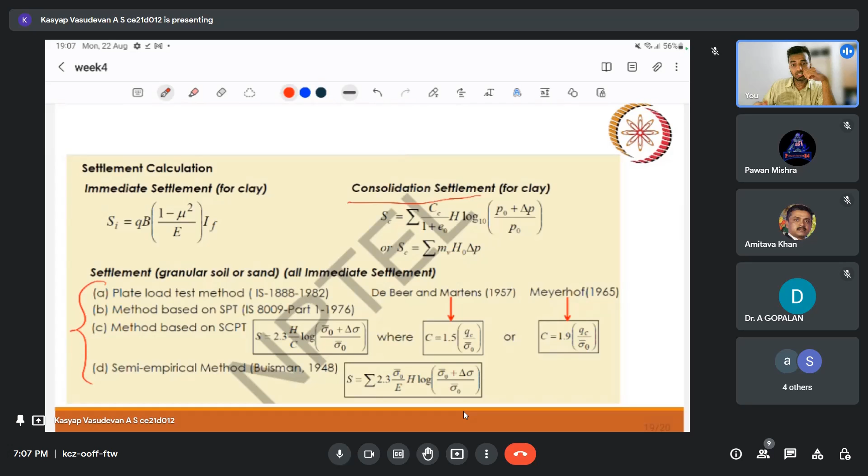I hope things are clearer, and if you have any doubts, please feel free to share. This is supposed to be an interactive session, so that will be appreciated. If you are hesitant to speak up, you can type it in the comment box, and I'll try to address it. If you get any doubts in between, you can always post it in our discussion forum.

I'd like to point out one more thing in the lectures, if you haven't gone through yet. He has discussed two or three problems which are very interesting because he has taken bigger problems and done different cases, for example different corrections. Please go through that also, it will be helpful.